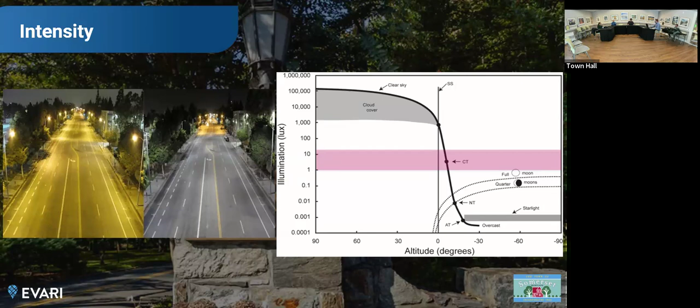When we talk about illuminance, it's the amount of light that reaches the ground, something that you can measure. Luminance is how much light reaches the eye. So illuminance is the criteria for pedestrian facilities, crosswalks, sidewalks. Luminance is the criteria for roadways. And obviously this is a pedestrian scale lighting study. Truth is, any roadway signed for 35 miles per hour or less, per IES, which is the Illuminating Engineering Society standards organization, which I sit in, doesn't need roadway lighting. The headlights do all the work.

So it's interesting, having had an opportunity to walk around last night. You don't have any pedestrian scale lighting. You only have roadway lighting, but there's no road signed for more than 25 miles per hour, maybe 30. Can you say that for sure? You don't need the roadway lighting. What about based on age? Because you're talking young eyes, older eyes. It's accounting for all those groups. The headlights are intended to do the work to identify someone or hazards in the roadway for motorists. That doesn't apply to pedestrians. Pedestrians have their own separate concerns and requirements. From a motorist perspective, the headlights do all the work at those speeds. It doesn't do anything for identifying pedestrians very well.

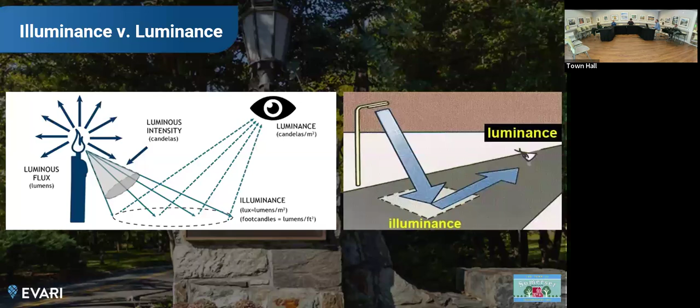Still, that presents an interesting dichotomy here: we have a lot of roadway lighting. What can we do with what we have already to be more pedestrian focused? Can we have both? Oh, sure. I think that's the goal here. So if you hear me talk about illuminance versus luminance, illuminance is how much light reaches the ground. That's really what we'll be talking about. We'll talk about uniformity. This is what it probably sounds like. It's the distribution of light on the ground, how uniform it is, if you have light and dark spots versus very consistent.

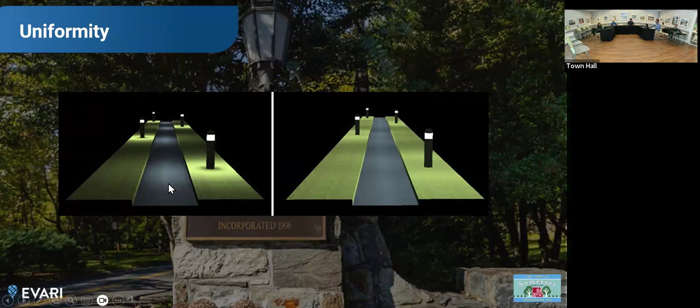You'll hear me talk about BUG ratings: backlight, uplight, and glare. Backlight is light that goes off of the roadway. It's generally lighting pedestrian facilities, front yards. It's generally considered nuisance lighting, like trespass, obtrusive light. Some cities are very friendly with that. For example, the city of Philadelphia has a policy that their street lighting tends to go from keyhole to keyhole. So it doesn't stop at the property line, but goes all the way up to the stoop and up to your keyholes for safety reasons.

Uplight is the amount of light that's being emitted straight up into the skies, above 90 degrees. It's not doing anything, it's wasted light, wasted energy. And the third and final one is glare. Glare has become a particular problem amongst LEDs. It's something that I didn't really even worry about until LED technology really hit the market back in 2010. Because it's such a small light source, it's difficult to look at. You may find yourself looking away; the term for that is disability glare. It's so blinding you look away. Obviously, that's unsafe for a myriad of reasons, so it's something that we try to mitigate.

BUG is a rating from 0 to 5, and every streetlight fixture has that rating attached to it. You don't necessarily want a 0 on all of those, very little backlight, uplight, and glare. You end up with these pencils of light and not illuminating very much at all. So when it comes to BUG ratings, you have to balance out these different criteria to get something that works for all these different needs.

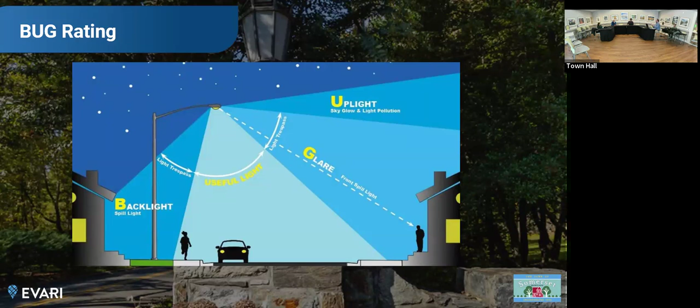Specifically talking about glare, if you have astigmatism like I do, you might see this kind of starring effect from lights. Done poorly, LEDs can be very unattractive and a nuisance. From what I could tell, walking around and driving last night, you guys have a pretty good fixture already. Compared to roadway lighting, pedestrian scale lighting is often lighting outward, and so it's easier to see that LED diode, whereas roadway lighting is pointing down, so you don't look right into it as much. So it's something very important to consider when talking about pedestrian scale lighting.

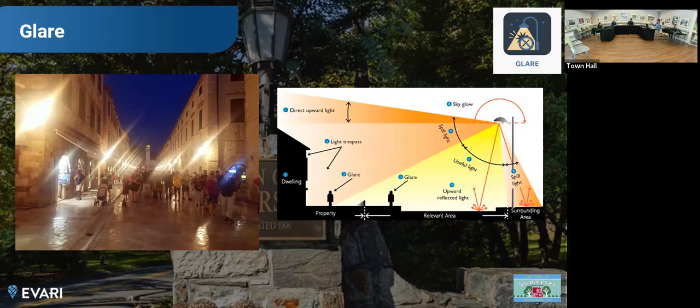You might be familiar with CCT, color temperature. If you go to Home Depot and you buy light bulbs, you'll see warm white, soft white, or cool white. Those are different ratings expressed in Kelvin as a color temperature. Driving around today, I could tell that you have 5,000 Kelvin installed just about citywide. It's 3,000. Is it really? It should be. I mean, it's Pepco. I never trust them, but it should be 3,000. Okay. It could be the case. There's a 5 listed on all of the fixtures, which signals to me that it's 5,000 Kelvin, but maybe I'm misinterpreting that. It's supposed to be 3,000 Kelvin, let me put it that way. We can check. Okay. Gotcha.

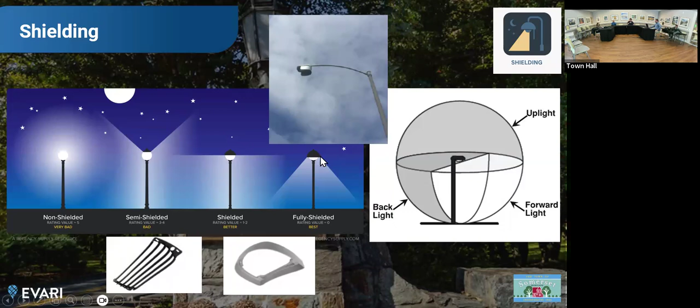So these globe fixtures were very popular for a long time. You see some of them in DC in the National Mall. They're still emitting light in a 360 spherical shape. It's putting light everywhere, not down where it's intended to go. And now we're opting for more of these capped fixture types. You see a lot of these in DC as well, as an example, pointing light downward.

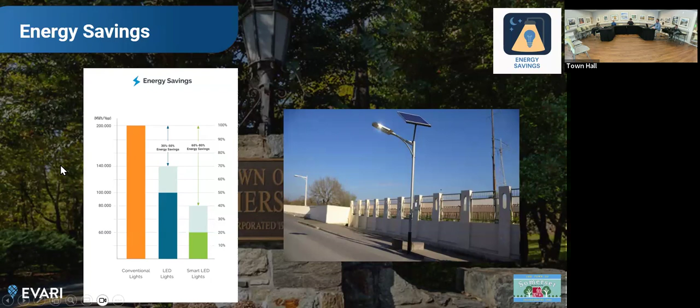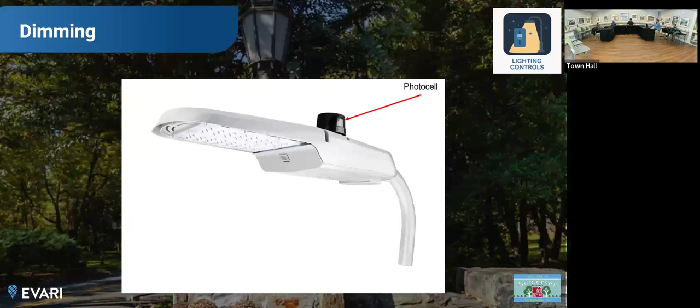Energy savings is another obvious component of this conversation. It's something that we're looking at, identifying ways to improve the quality of lighting without a significant cost attached to it. We'll talk about dimming. In the early days, all you could really do was turn them off and on. Now we have things like photocells. That's what I've mostly seen around here. It seems that all the streetlights have photocells. So if it's dark enough, it notices it and it sends a signal to the streetlight to turn on.

We now have connected systems. These are becoming more and more common in the United States. From a system control, you can manage and dim and turn on streetlights across the entire network. These first came out around the time of LEDs. You can't dim the old school HID fixtures the same way you can with LEDs.

Can you change the color temperature now? You can't yet. No. Not yet. Coming soon. I'm begging the manufacturers to make it happen. Right. Okay. The drivers, the technology that underlies it, is capable of doing that. There's no reason they can't. They just have to manufacture it, find a market for it. So we're hoping that in the next couple of years we start to see more of that.

So this could be a good option for the town of Somerset. At 3 in the morning, I doubt you see a lot of people walking around. Probably mostly people out walking their dog in the evening, maybe a few joggers in the morning. Dimming the lights to focus not necessarily on where you need the light, but when you need it, would be a very good option. There's obviously a cost associated with it. Given the size of Somerset, it's something we have to do a deeper analysis on, but something that we're going to want to explore.

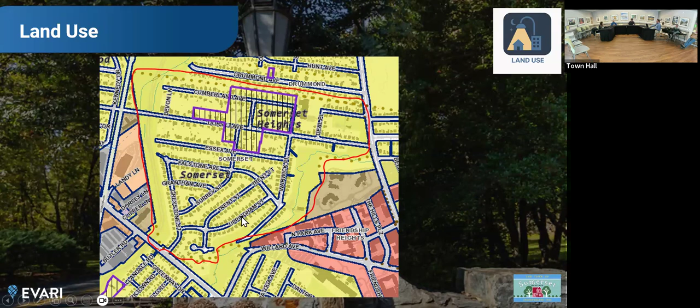A lot of the research that my firm Evari has done is expanding on this idea. We found that pedestrian fatalities in the United States are just ticking up and up every year. This graphic is a little old. It stops at 2022. 23, 24 has continued to go up. Interestingly enough, we see this trend almost all occurring at night, but very little increase in the daytime, and adjusted for population it is negligible. Obviously, something has changed about the nighttime environment.

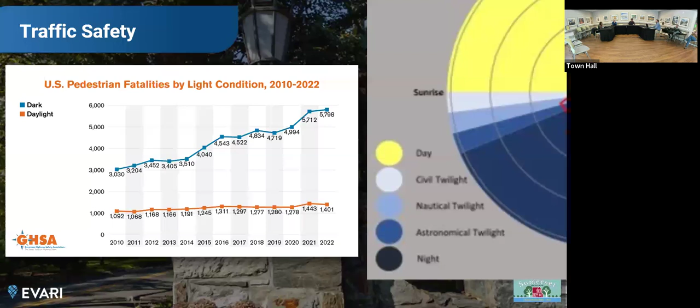We turned this corner in 2010. You were seeing a consistent drop in fatalities year over year since the 70s. 2010, something changed, and now it's continued upward. At present, four out of 5 pedestrian fatalities occur at night, 80%. Evari's research that we have led is looking at that at an even deeper level, particularly at dusk. 1 in 4 of all pedestrian collisions occur during dusk. It's only a very short 60 to 90 minute period. So there's an outsized risk that's occurring during that very short time. We're trying to understand why that is. It's very new research that we put out.

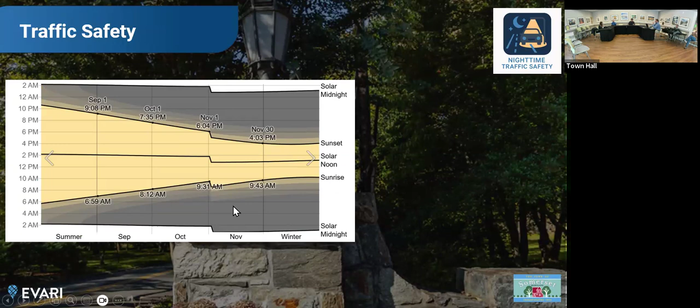When it comes to pedestrian safety, if there's anything I leave you with as a concept from today's discussion, it is this concept: brighter lights will make dark spots appear darker. So if you have a very bright light shining on a specific area, the area around it will appear darker because of the eye's ability to adjust to its environment. It'll make everything else appear much darker.

So often the solution isn't necessarily more lighting, because it's going to make its surrounding environment appear darker and potentially more frightening or scarier. Low levels of lighting, really the minimum recommended amount over a wider area, is the best solution, instead of having a strong beam of light in a specific area and being negligent to its surrounding environment.

Another important concept that we'll be evaluating is contrast, particularly as it relates to pedestrians. I'm sure you've noticed when you're driving around and you see the LED headlights of oncoming traffic, it makes it difficult to see what's right in front of you. That's particularly true for a pedestrian. If you're backlit as a pedestrian, it gives you a silhouette effect where everything is lighter around you, and the object, the person, is very dark. It's hard to see. It effectively makes them invisible to the motorist.

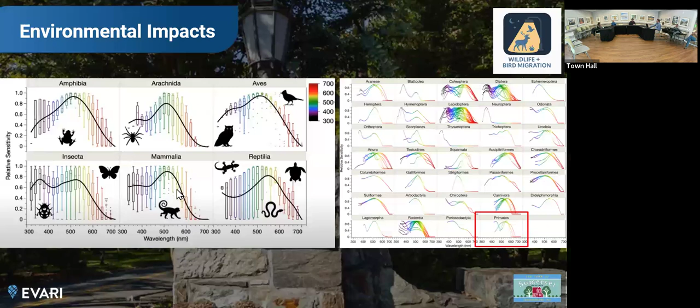Is there any immediate endangered species in the Somerset area? I know there's a couple of creeks around here. There may not be. That's something we're going to take a look at. We did a project recently in a very urban area of Southern California. There's no animals at all, maybe a couple of raccoons, but they're not endangered. So it wasn't as critical, versus we're doing a project in Kenai, Alaska right now. It's all manner of endangered animals up there, so a more significant element of that project. So something we'll be looking at.

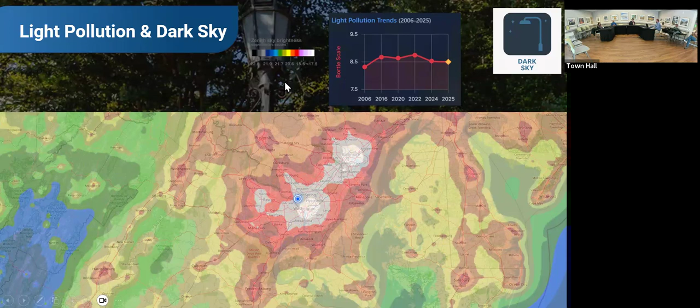For this specific area, the town of Somerset, we haven't seen a huge increase or decrease. We've pretty much leveled off over the last 20 years, which is great. It's a sign of significant improvement, whereas the rest of the world is going up and up and up, more and more light pollution, reduced ability to see the stars, among other things. Things like light trespass, light shining on the window.

Now, a place like Somerset, it's a bedroom neighborhood, and it has a notably different need. But as was mentioned earlier, many cities we work with have a very particular style of streetlight that is meaningful to them, and it's a potential option for a place like Somerset if pedestrian scale lighting is something that's intended to be invested in. There's elements of economic vitality, and that's not necessarily present here in Somerset, but something we often look at.

Ultimately, all these different things lend themselves to a balance in design. How can we evaluate all these different competing priorities where we need some light? Some places we need more light, in others we don't need as much. And doing so in a way that's responsible.

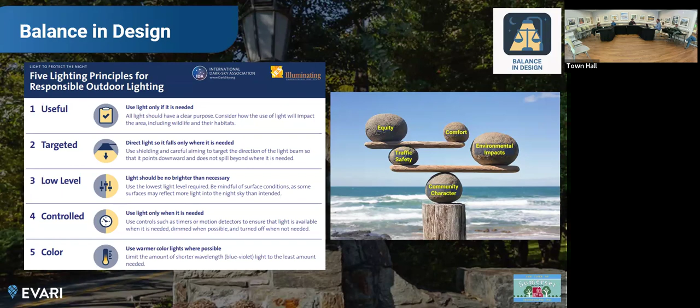The ability to control it, whether that's dimming, and then finally color. Color is 5th and last intentionally, because although it does have some effect when it comes to dark skies and light pollution, it is the least important. So there is some role, but these other things take precedence.

I was out last night walking around with our handy dandy photometer, taking measurements along sidewalks throughout the city. And generally speaking, we're looking for relatively low pedestrian activity. High pedestrian activity is like Times Square, very, very high. And mid-range is most commercial districts. So a neighborhood like this is where we're looking at 2 lux of light.

On average, we're seeing probably closer to 1 in most cases. So there's an obvious present need for more lighting. And of course, this is just a recommendation for what that average is. So you can definitely depart from the minimum recommended guidance, but this serves as a basis for all the research and studies that have been done on preferences for good lighting. Yeah, that's worse in the summertime, of course, when the leaves are in full.

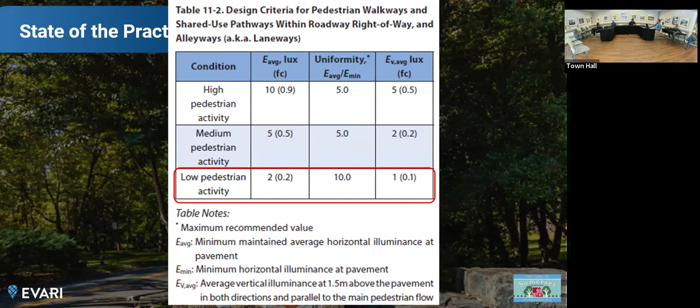Is the only way to fix that to put lights on the ground? There's a number of ways. We're going to get to some of that, okay. We'll get there. There's probably half a dozen to a dozen different options that we can look at. Some are less expensive, maybe some are non-traditional, and then some are really high quality and very beautiful options. And we'll explore all of those.

Right, so I was just mentioning, we have roadway lighting here in Somerset. We do not have pedestrian scale lighting. So from one perspective, as was mentioned earlier, if all the streets here in Somerset are signed for less than 35 miles per hour, which they are, we don't need any roadway lights. You could take out all the lights and still meet the design criteria for roadway. You wouldn't be meeting it for sidewalks.

It's an entirely different set of criteria here. But you're not going to get there necessarily by changing the roadway lighting. Pedestrian scale lighting is the way to achieve that most effectively. So these maintenance concerns, things that we'll be looking at. Touch on that briefly.

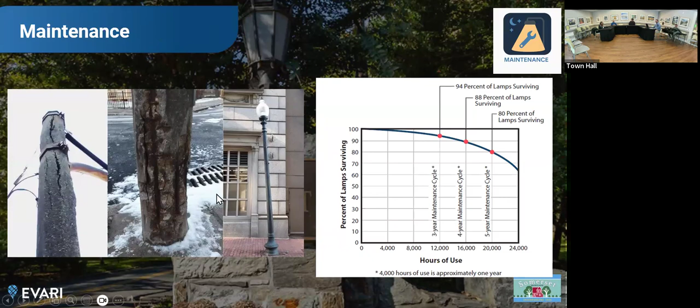So you have this 20-watt LED that's installed. This looks like an Acuity brand fixture. Does anyone know? What's actually AEL? I have the specs. So this 05 is what I'm most curious about. They are supposed to be 3000K, are they? I'll be checking on that.

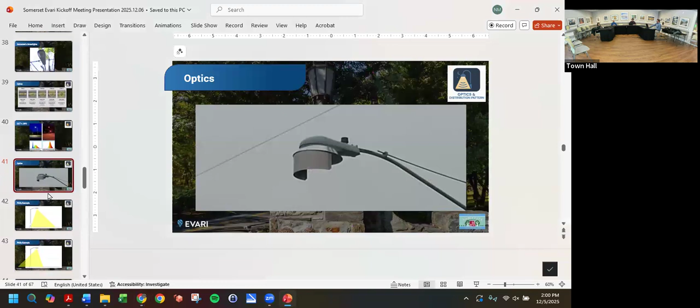One other perspective here is something that's also now available. This is something that was somewhat pioneered in the city of Philadelphia. We just helped them convert to LED. I believe they're done converting or just about to finish converting. They converted 130,000 lights to LED.

And this is your more traditional beam of light. The option is just to rotate the panel so that it's intentionally backlighted. This is what that LED panel looks like, and it's just a matter of turning it around. They kind of pioneered that concept.

Philly is a lot of one lane, one way roadways. It's low speed, you don't need a lot of lighting. They have very wide pedestrian walkways, sidewalks, a lot of people. So it was very useful to install a light that was just rotated backwards effectively.

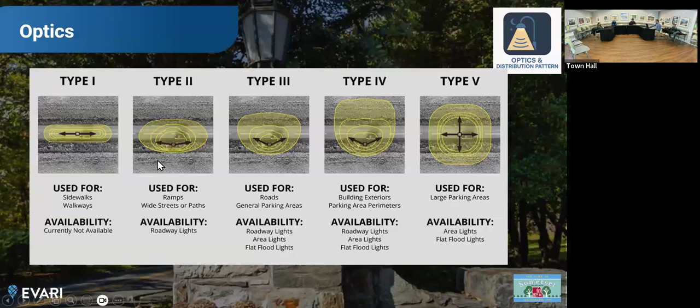Where is that panel on the pole? So your lights look a little different. You have this one big old diode here, and that's a AEL Autobahn special. One big bulb putting out light, versus most other manufacturers have this panel of smaller diodes.

There's many of these, and they're all installed in a very specific way to get that different distribution pattern. One light's going down, one light's going a slightly different angle. They're installed to create a specific beam pattern. You can even control that to be any number of shapes.

This light, you don't have that same opportunity, other than just rotating it. It's going to generally have this pattern of light, shooting light across the roadway. So if you just turn it around, it would be backlighting the sidewalk, or at least you'd have more light there. This is, again, a less traditional option, but a potential easy, low-hanging fruit solution.

When you say turn it around, is that the arm you're turning? So that is one option. Just rotate the arm. Or you just flip that panel, so the arm stays in the same orientation, but you turn the light bulb around effectively.

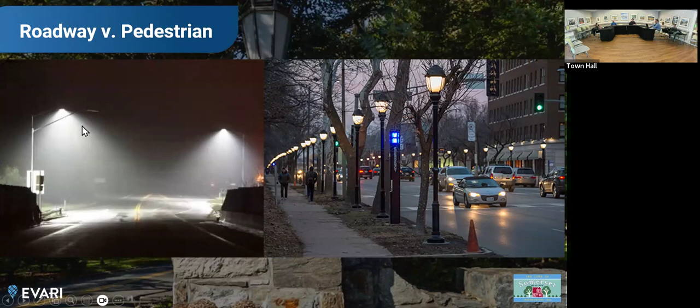One of these, especially when it's mounted on a wood pole, the cost comes down even more. The most expensive part of the street light is the pole itself, foundation, running the electrical under the ground. If you're running it on a wood pole, it's relatively cheap. You just tap right in there. How much does solar reduce the cost? Because you've got no wires then, obviously.

There's a greater upfront cost that you make back over time. There's nice solar panels on your house. I'd say even 5 years ago, the economics for solar panels didn't really work. The technology has improved and the costs have come down significantly, and now it's starting to make sense more and more. So definitely something worth exploring.

My company does analyses on a citywide scale that evaluate topography, building shadowing, tree canopy, pole heights to evaluate where the best candidates for solar panel lighting are. Effectively, you throw a dart at the map, it'll tell you exactly what the size of the panel is for that one location. We do that on a citywide scale, or anywhere. Okay. So something that could be explored.

Your tree canopy is gonna make it pretty difficult though. And I believe you have a tree certification. Yeah, we do the Tree City. In Philadelphia, I believe it was 7,000 trees they had to trim in order to get their LED conversion, which would amount to a 70-year backlog for their arborists. So they had to get some extra funding. They weren't particularly happy about it, but it was the nature of the beast, you couldn't avoid it.

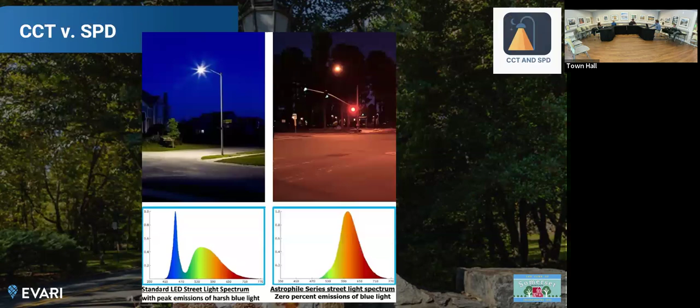Yeah, I mean, you'd have to do some pretty serious cutting to cut that back and maintain it over time. It's difficult to predict how a tree's gonna grow. We did that. We really trimmed back. We did some trimming for the LED lights, yes, we did. Because there were some streets, I know I walked them at night. I said, if the leaves weren't in the way, we'd be fine. Yeah, our arborist was actually listening to the talk, but we do have an arborist in town who guides us on trees.

Nice. So that's the bulk of my presentation here, but I know we have plenty of time left. I really wanted to use this as an opportunity to answer questions or go back to anything specific that there might be a need for more insight on.

All right, obviously I need to check to make sure that we do actually have some on our lights. What's that? What'd they say? They are 50 watt, and they are supposed to be. Well, we'll assume so. They look okay. Bluer. All right.

Timing, so you were continuing to study the town in June, right? And so you'll give some kind of report to us after that? That's right. We got our first set of field measurements with our photometer. We're gonna complete the inventory of your system this weekend. My sister lives just on the other side of Rock Creek Park, so I've enlisted her to give me a hand. We have a bunch of analyses to do.

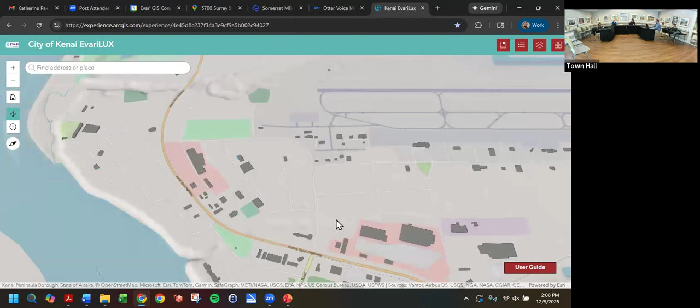The next major step, and this is Evari's real bread and butter, and I'll show you an example of another one that we're doing right now, is building an illumination model. So you can throw a dart anywhere on the map, and it'll tell you how much light is reaching the ground. You can see it displayed here. Orange, red is more light, blue is less, and beyond that, there's no light being provided from the streetlights.

Don't you almost have to do that twice? Once in the summer and once in the winter? Something we'll do is identify where the tree canopy is and just overlay that. Basically cut out where that is and say that there's a reduction in light being provided, but definitely less. It will be calibrated to our field measurements.

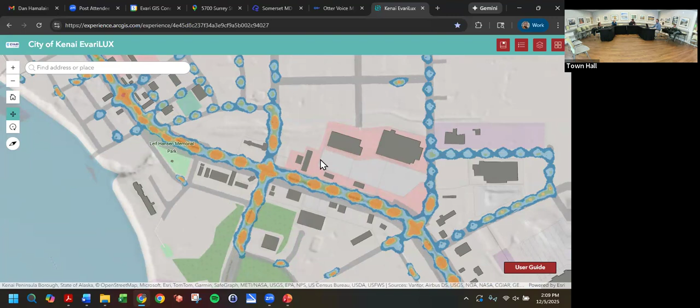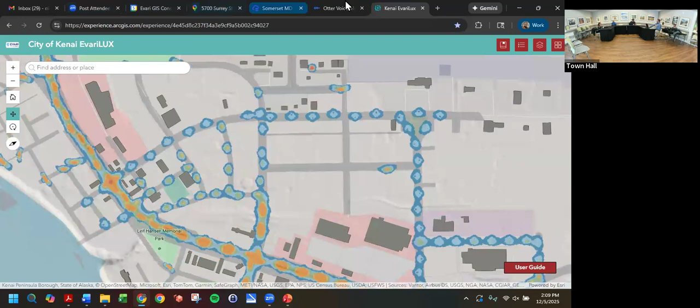Quickly you'll start to understand where there's light beyond just this binary yes or no, is there a pole or not? Just knowing that there's a pole doesn't tell you much about the quality of that light, how much light is reaching your eye. That's what these models intend to do. This is something that Evari has developed.

This is Kenai, Alaska. We're doing a streetlight plan for them right now. You can see quickly there are all these gaps in their lighting. There's this intersection here, no light at all. We're going to provide something identical to this for Somerset, and it's going to be very obvious where those gaps are and where to start filling them in.

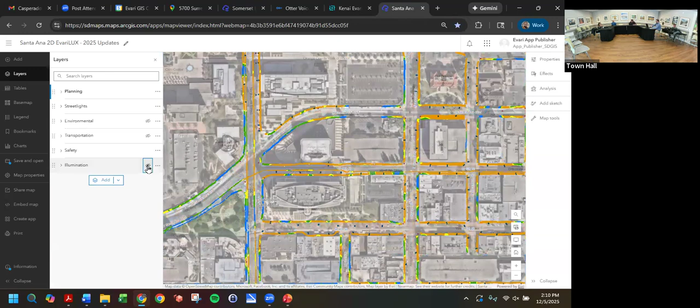We can take this a step further, let's see if I can find this easily, and look at this in specific contexts. We can look at this, for example, specifically in the area of sidewalks or crosswalks or bike lanes. This is Santa Ana, California. We're doing a streetlight master plan for them. Turn all these layers off. So again, you can see that illumination layer here. This is how much light is specifically within the crosswalk.

Oops. Did something I didn't like.

So orange, green, yellow, those are expected values, what we intend to see for the amount of illumination being expressed here. Blue, very little light, it's below the standard. Gray, no light at all. If we saw anything in red, which there's some here in Santa Ana, probably too much light. So we'll know via the modeling which sidewalks don't have enough light.

And you're telling us that there's definitely some without enough light just from your first observation. I mean, I can take a walk through there, take some measurements, and I know exactly where it is meeting standards and where it isn't. But we want to do this in a very methodical way, instead of shooting from the hip. Right.

And would you look at solar, to see if it's possible, is what it comes down to. Working with Pepco is a challenge, that's why I'm saying that. And if there is a way of doing it cleanly, without Pepco, it would be desirable.

If it is a higher upfront cost and we do get lower costs using it, that's probably okay with the town too. I'd be curious to look at your electric bill and how they do break down the costs. There's a pole rental fee, putting your own lights up, and the panels associated with that. And at some point, there's a break-even point where it actually is more cost-effective to have the utility manage it. Those are the headaches that commonly come along with that.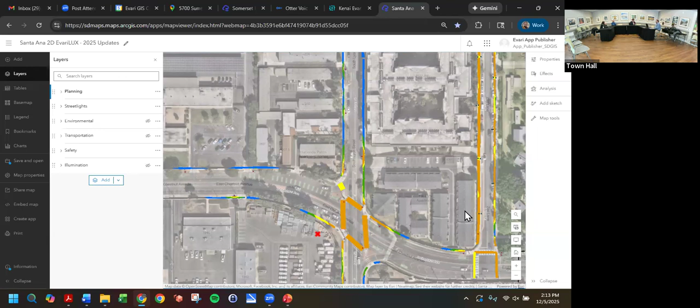So, I guess the question I have, just to confirm, is the city the owner of these lights, or is it the utility? Utility owns the street lights. And they're just providing it at your request? Well, yeah, we're paying them obviously. We paid for the installation of the lights. We didn't pay for the lights. They are Pepco's lights. And then you pay a monthly bill for electricity.

Yeah, yes. But if you said, I'll take them all out, would they go ahead and do that? For a fee, yes. Okay. I ask because every city and utility operates differently, and some would say, no, we're not getting them out for whatever reason. Not everywhere is necessarily reasonable from that perspective. In addition to that, there's pressure from other municipalities at a larger level, whether it's the county or the state, that wants some kind of minimum lighting. But if that's the case here, that definitely makes things easier to just go and say, this is what we want to do, and they'll do it for a fee, obviously, but it sounds like there's a working relationship.

Yeah, well, we do have a working relationship. There is a contact, Alberto, so we can talk to him. Yeah, there are some state laws with respect to municipalities' rights to, for example, request that Pepco sell the lights to the municipality. Another nearby jurisdiction started down that road and found it very difficult to negotiate because Pepco doesn't want to lose that revenue. So it might be a complicated process, but the option is there.

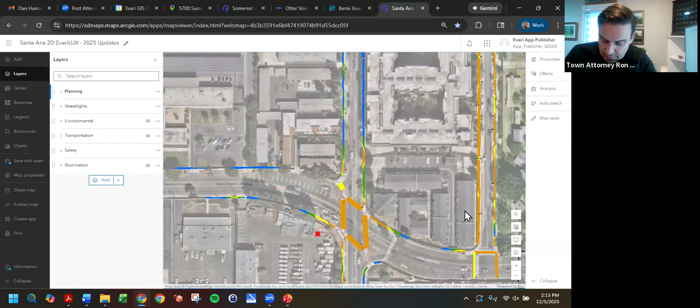Yeah. I spoke at a utility conference last year down in Florida. I started my presentation just as I did here today: why do we provide street lighting? Someone in the audience said, to make money. Utilities, since they're quasi monopolies, have limited ways in which they're allowed to make money. Street lighting is one. There are many ways they could make money out of LED lights if they wanted to, but they are not showing any interest in doing it. Yep, that's nationwide. I'm not surprised.

But still, it sounds like, of the menu of options here, this doesn't close the door on that. Other cities we've worked with, they can't even get a hold of the utility. They want something done, they tell them to beat it. So this is a good start point. Having a contact is a good thing. All right, okay.

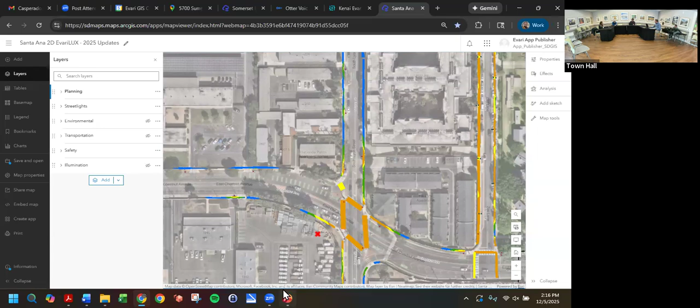All right, thank you very much. That's great. Thank you. Any other questions? Maybe from our Zoom attendees? I think it's only our town attorney. Is it only Ron that's on? Yeah. We're all being recorded, so it will be available to the other council members. Thank you very much. It was very interesting. Thank you, I've been listening in. Very interesting. Thank you so much.